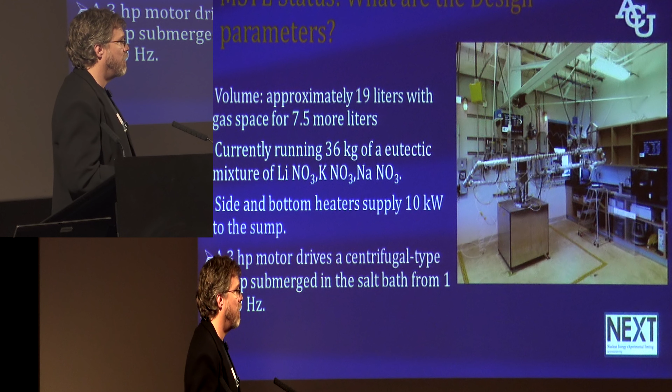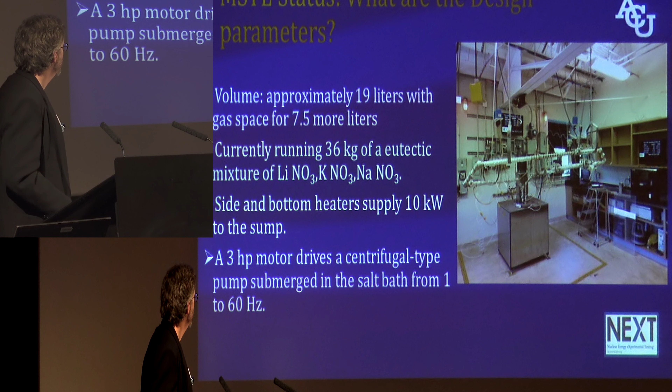The volume of salt that we have is about 19 liters, and there's space in the top for gas of about 7.5 liters. We're currently running about 36 kilograms of eutectic nitrate salt. The side and bottom heaters supply about 10 kilowatts total of power for our pot heat.

We also have heat tape that you saw a little bit earlier, I'll talk about more in a second. There's a 3 horsepower motor that drives a centrifugal pump. It runs from 1 to 60 hertz, and I'll also talk more about that in detail here in a second.

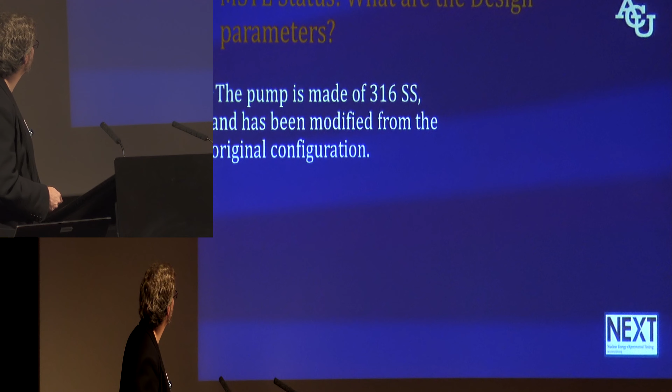So the pump is made of 316 stainless, and so are all the pipes and fittings that we're using.

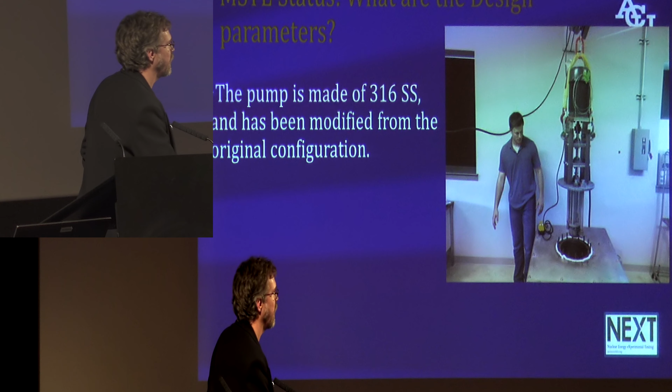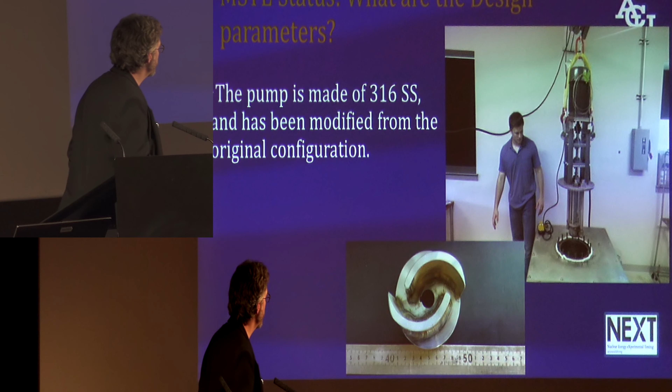We have had a little bit of trouble with the pump. Here's a picture of it as we're putting it in. We ended up having to modify it from its original configuration. Here's a picture of the impeller. It actually took us a couple of iterations to figure out, but we were having some trouble with resonance.

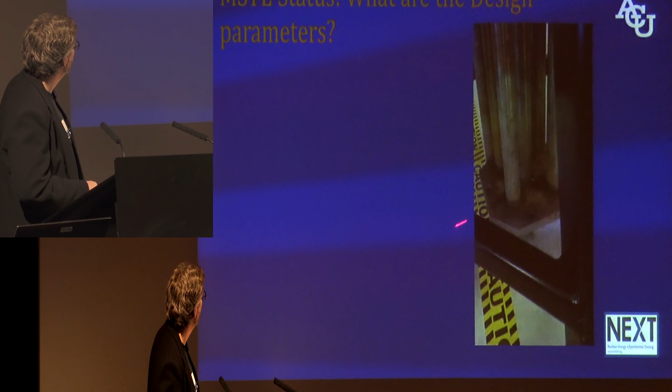You'd get to a certain speed and the thing would start shaking violently, and it would make sounds and make everybody run away. But what we found was, well, the impeller is not balanced. So we sent the impeller back. Well, that's an easy enough fix, right? Well, it turns out that wasn't all.

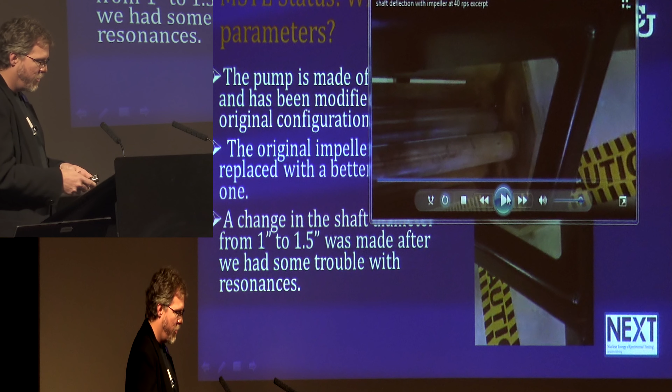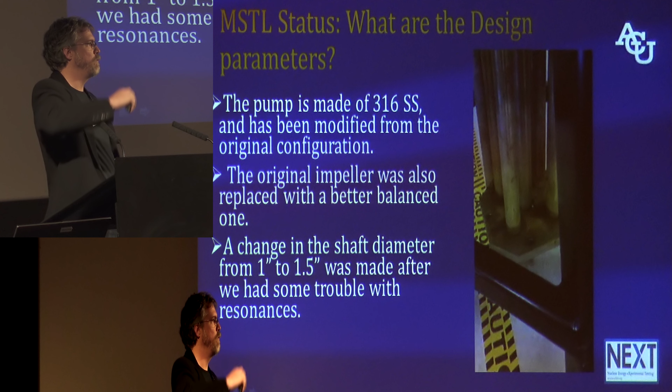That is not what you want your shaft to be doing at all. What we found was, after quite a bit of work and surprise, that the shaft for the pump was actually not round. Not exactly what you expect when you purchase a pump like this, but yeah, the shaft wasn't round. We went to a bigger shaft, because this is a cantilevered shaft, so the bearing support is a good 2 feet above the impeller. To make sure we didn't have this problem again, we asked to replace it with a 1.5 inch shaft instead of 1, and that fixed it.

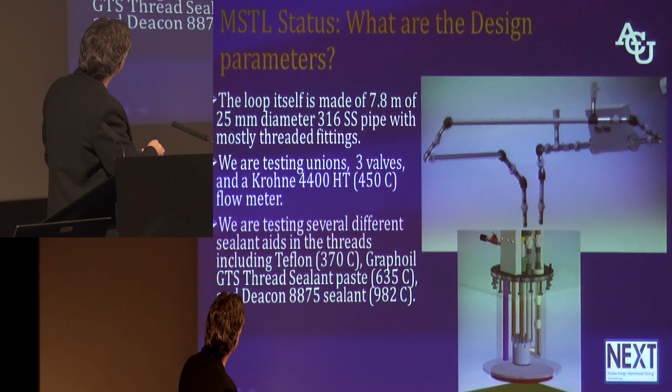So that was good, this is one of the trials we went through. The loop itself is about 7.8 meters of 25 millimeter pipe, so 1 inch for those of you from the US.

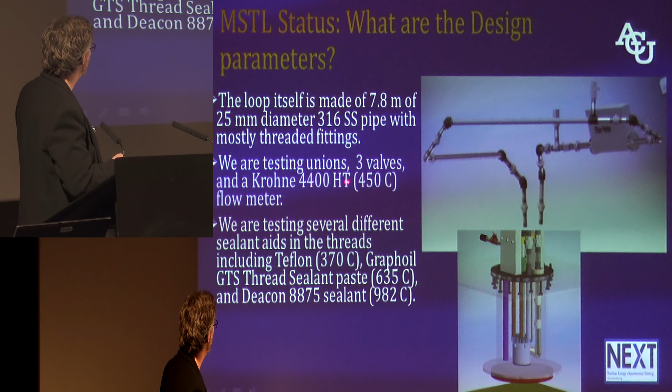In this loop system, we're testing unions and 3 valves and a Krohne 4400 HT flow meter. This is the highest temperature flow meter we could find. For 2-inch pipe, they claim it'll go to 600 C. For 1-inch pipe, they ratcheted down their claims to about 400 or 450. So we'll see what it can do.

We're also testing several different sealants in the threads just to see how threading works. Teflon, of course, we don't expect to go very high. We're trying out this graphite stuff, a mix of graphite and something else that goes a little higher, and then this very high temperature sealant that we're interested in looking at.

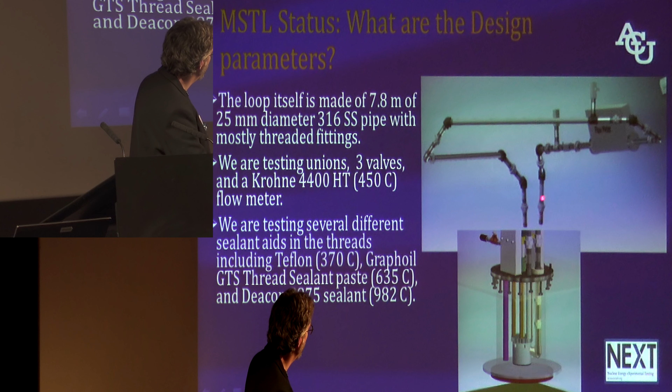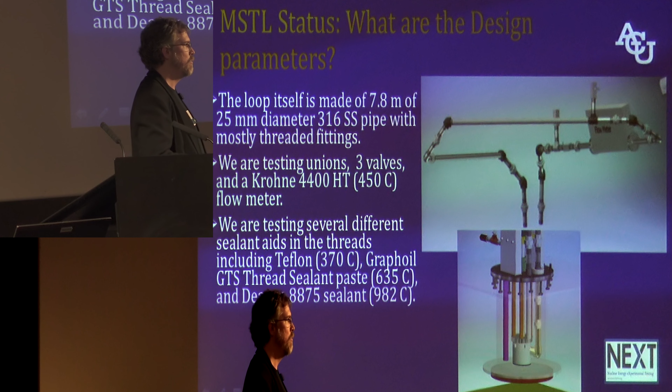Another thing we found when working with water in this system: we characterized our system with water, and in initial tests, there's a gray pipe that runs down from the return side of the loop. The silver looking one is the input to the loop, and the fluid goes around and down through the return. Initially we didn't have this pipe here, so the salt came in and splashed down into the pot, and that made lots and lots of bubbles.

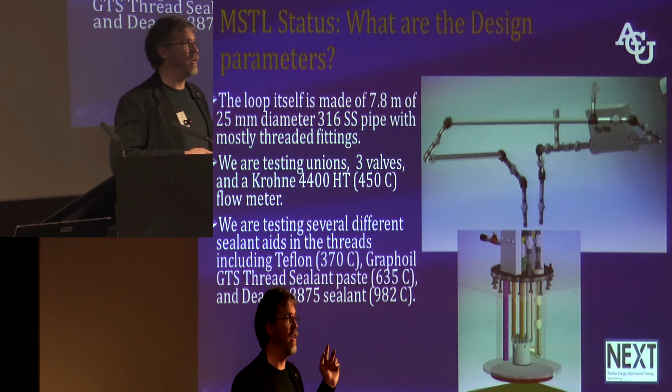It sounds like bubbles may be good sometimes - we're interested in that for filtering things and maybe getting a hold of some fission fragments. But in our case, it was causing the pump to cavitate, which is also a problem. It's also a problem if you're using an ultrasonic flow meter that uses non-Doppler methods. These time-of-flight flow meters need less than 2% of bubbles or other trash in the path, so it's very difficult to get them to read if you have a lot of tiny bubbles floating around. So we extended this pipe down into the liquid molten salt, which solved our problem with bubbles. It introduced other problems, which is why we have a valve up here to solve getting air trapped up there at the top.

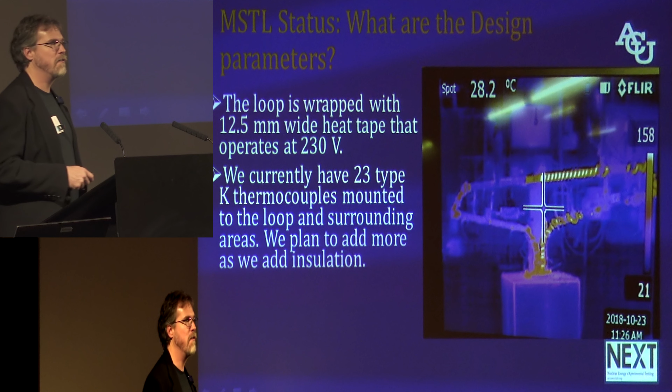We also have heat trace around the loop - about 4 kilowatts of it. As Dr. Pamplin said earlier, these are just wrapped, and there are sections here wrapped in aluminum foil to help spread the heat more evenly.

This was the first time we had run all this together, so we were interested in seeing how different things looked and how they were acting. Not everything is covered - of course we plan to insulate this as well. This was our first run, so we were looking for leaks, and we didn't want to ruin all of our insulation because all of the joints decided to leak at once. So we left off the insulation for the first run.

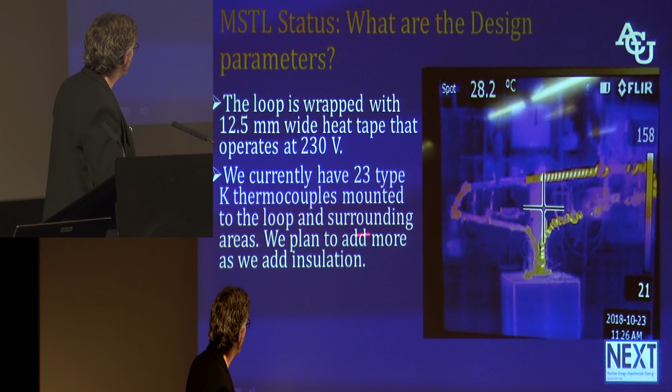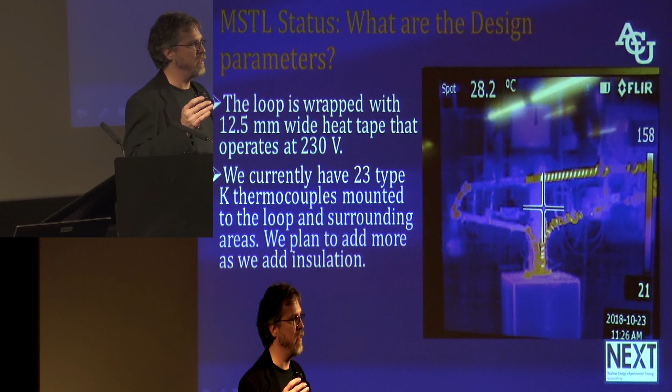We also are monitoring everything, keeping as good of tabs as possible on our heat at every point in the loop. We have about 23 thermocouples mounted directly to the loop itself and a bunch more everywhere else, monitoring bearing temperatures, motor temperatures, and every other temperature in the room. We even had some concern from folks in the safety office at the university that we might set off the sprinklers, so we've got thermocouples up on the ceiling monitoring temperatures near the sprinklers.

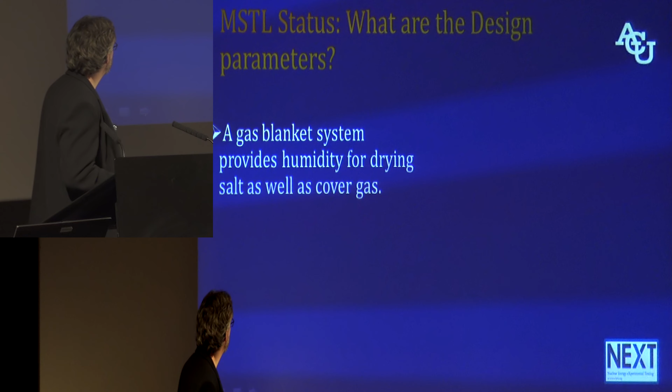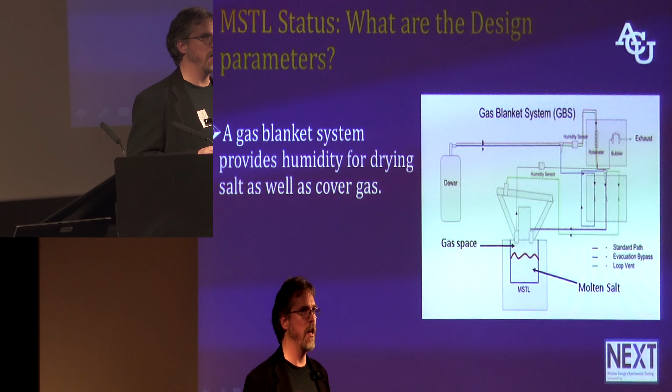We also have a gas blanket system made to help us dry the salt and to use as a cover gas. This is a quick schematic of what our gas blanket system is. For the current system, we're using nitrogen as our gas blanket. That might change to argon or helium or something else very easily.

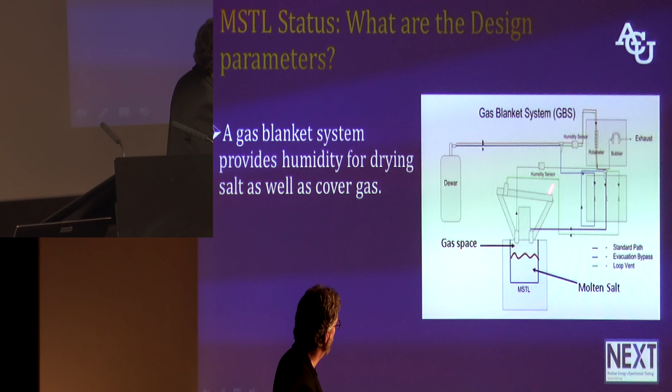We have a supply here that goes through a humidity sensor, through some set of valves, and into the tank. We also have a release valve here. Since both sides of the loop are actually beneath the level of the salt when it's molten, the salt gets stuck in the loop if you don't have this way to release it. So we have to put pressure in at the top of the loop, and that lets us push it out when we're ready to stop.

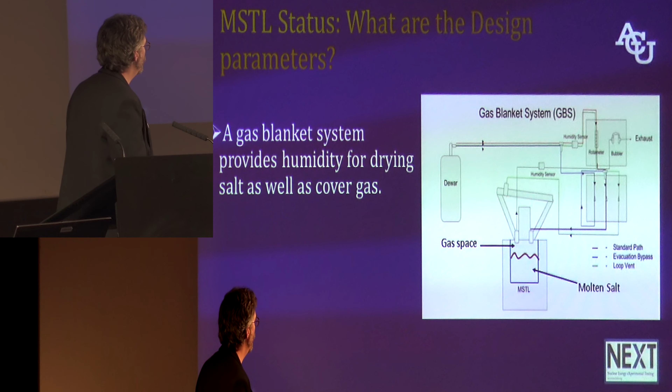So we also have a DAQ system. Our DAQ system is based on the MIDAS system developed at TRIUMF and PSI, and has been used for slow controls for physics for many years. You can monitor many things all at once, and it works very well.

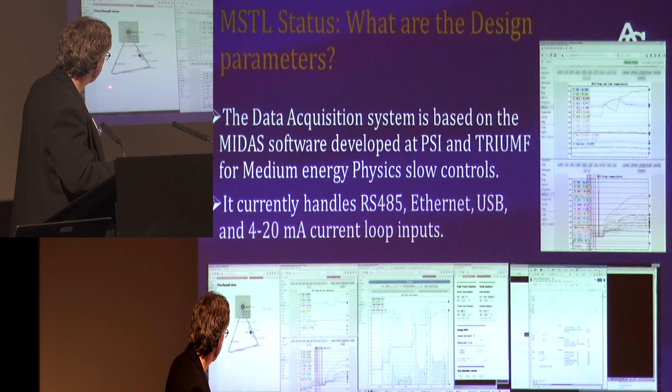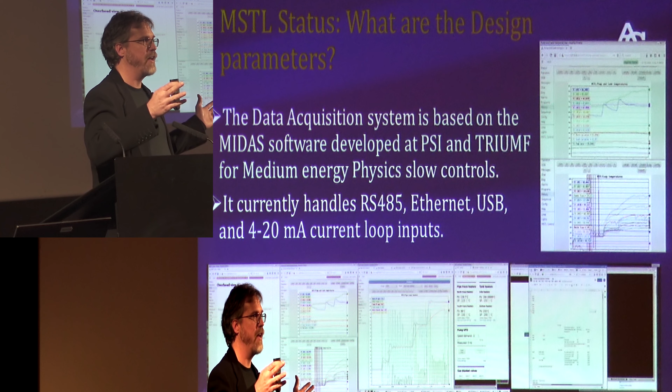We've got some programmers, so we add things to help us understand exactly where temperatures are different or what parameters we're really worried about. Besides this screenshot of the screen we use to control the loop, we also have 3 big monitors around the room so that we can monitor critical processes at all times.

So we characterized the system with water. We started with just a basic off-the-shelf flow meter. We put that in line with the Krohne high temperature meter, and we also did the simple thing: we pumped water into barrels and weighed it and said, okay, what's the mass as a function of time? Look at that slope, and that gives us a flow rate.

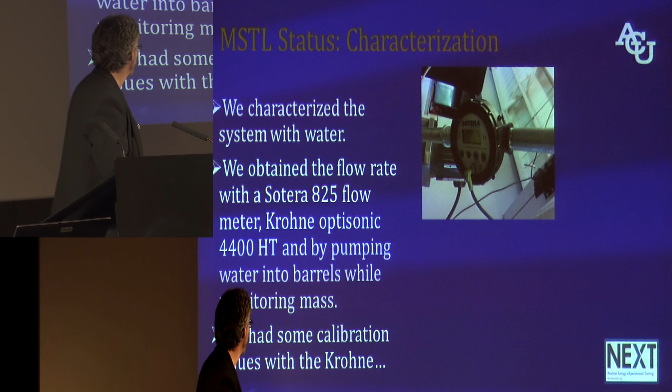It turns out we were very glad that we did that low-tech thing, because we had some calibration issues with our very expensive flow meter.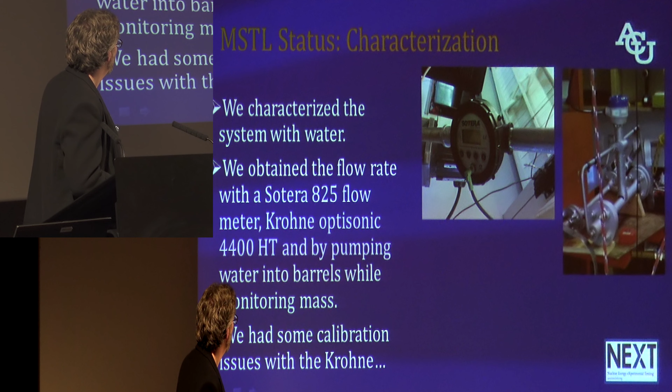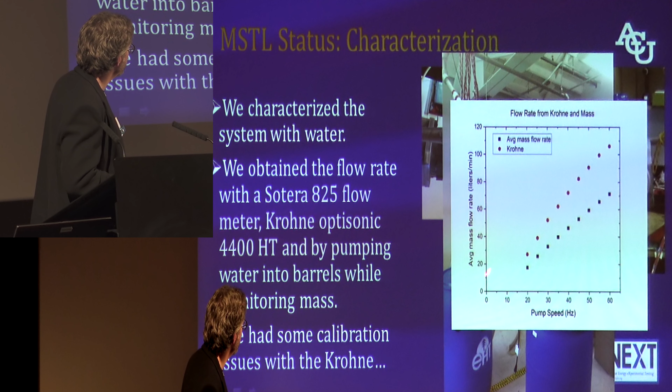So there's the acoustic one, and here's our barrel setup, and here's the flow rate. If you just plot mass flow into barrels versus what we originally got from our Krohne meter, you can see that wasn't the 1% claimed accuracy of this meter. So let this be a warning that you should test things. They don't always work like they say they do.

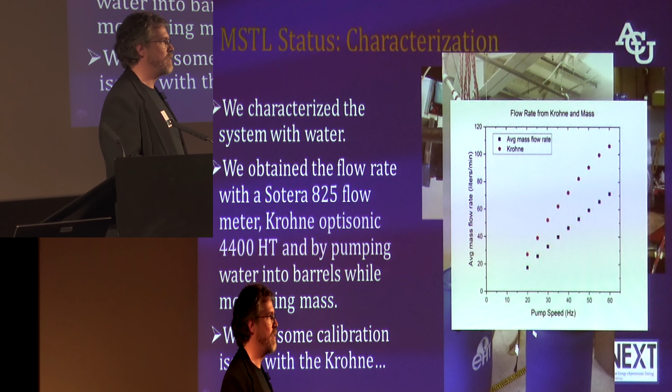After, I don't know, several weeks of back and forth with this company, we did get it fixed, and they just typed in a wrong number at the factory. So nothing really wrong, just something annoying to cost us some time.

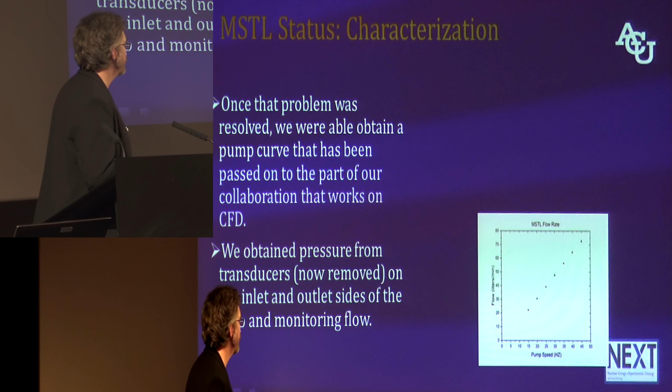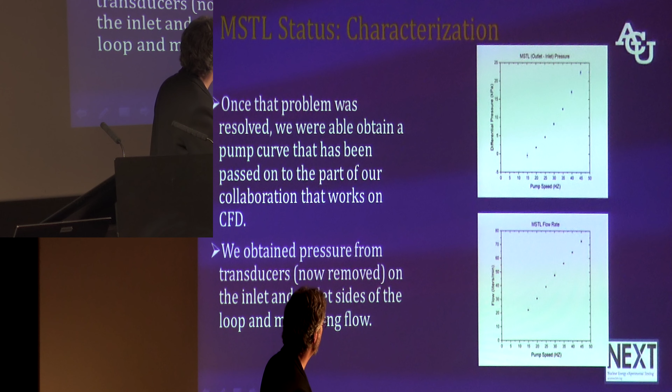We measured flow versus pump speed, and also differential pressure versus pump speed. This was exactly the same setup that we have currently for the molten salt, except we drilled 2 holes in some of the pipe sections on the input and output side of the loop, and placed transducers there for water, and measured those. Then we replaced them with whole pipe sections when we went to salt.

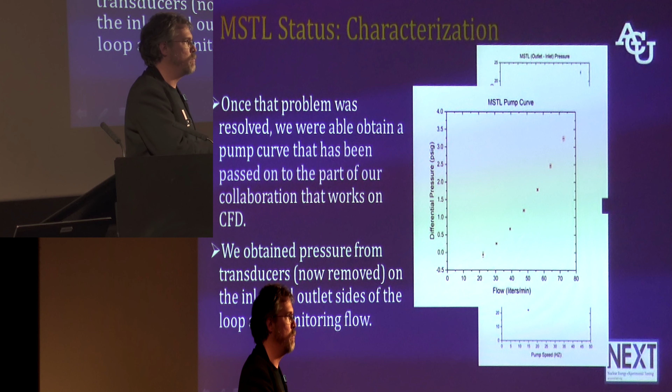Putting those together, we have a differential pressure pump curve that we can hand off to our colleague, Robert Brown, who does CFD. He has all of the measurements of the loop and will model this for us, compare his results to our experimental results, and then we can apply those things to salt and make sure that we know what we're doing.

Okay, so we have pumped salt, and how do we know? Actually, when we turned it on, the flow meter read 0. That was unfortunate and surprising, but I think I have an idea of why that is, but we still could tell that we flowed salt.

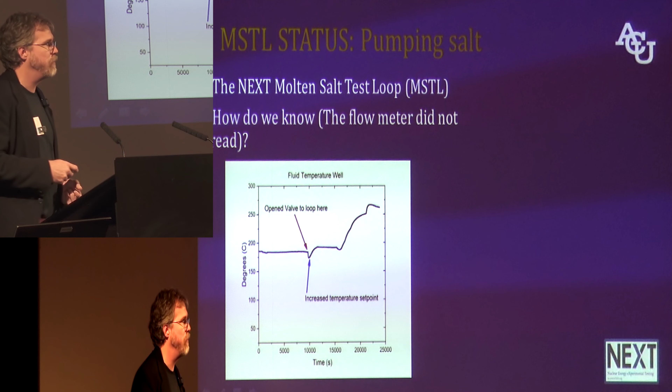When we turned the valve to open the loop, we had a precipitous drop in the temperature, and it was dropping so fast we were worried that it might freeze on us, so we turned up the set point to the heaters to add a little bit more heat. That's what this little blip is, where we were sure we were melting salt and getting it back around the loop.

Another piece of evidence is that we actually sampled salt, and you heard about this earlier in Dr. Pamplin's talk. We opened this valve while everything was pumping, and we were able to get salt out in its molten form.

So lots of things that we're looking to develop or test. We're looking at the Coriolis flow meter. Sporian Microsystems has a website that says they have a high temperature flow meter, but we haven't been able to get our hands on one yet. We'd like to test that.

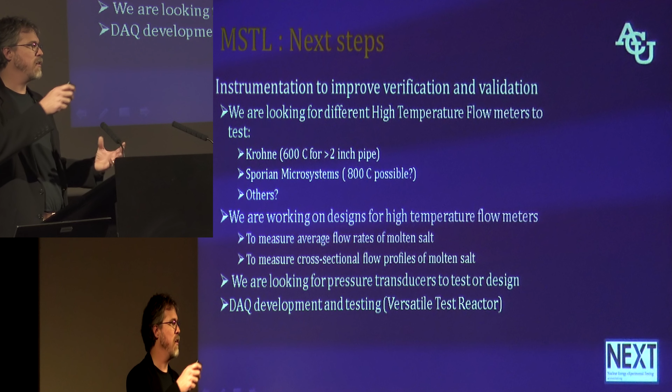If there's others out there who have things that they want to test, we'd love to try and test those. We're working on designs of our own for high temperature flow meters to measure average flow rates, but even better, it would be great if we could come up with a design to measure the cross-sectional flow of these things, and that would really help the CFD folks understand what's going on in the reactors.

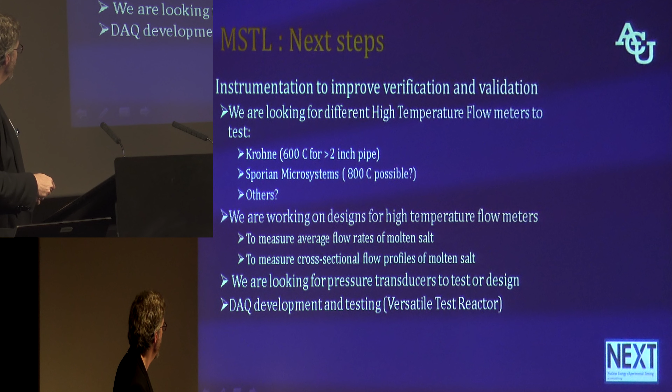So we're trying to move that way too. We're looking for pressure transducers and designs for those so that we can directly measure pressures of molten salt. And of course, we're looking at DAQ development.

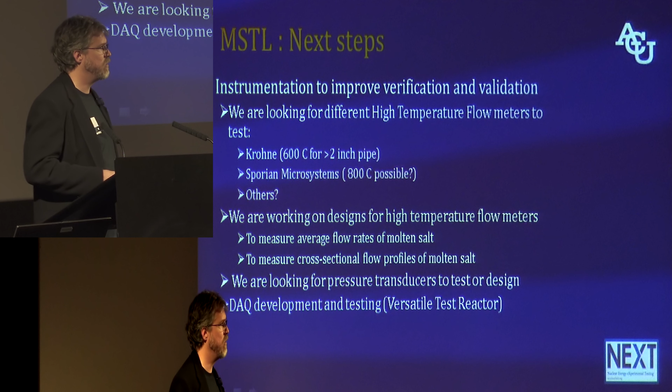We recently received a grant from the DOE to develop the DAQ for the scientific instruments at the Versatile Test Reactor that's just been approved. Our Congress can do something occasionally. So that's been approved, and we're moving forward with those designs.

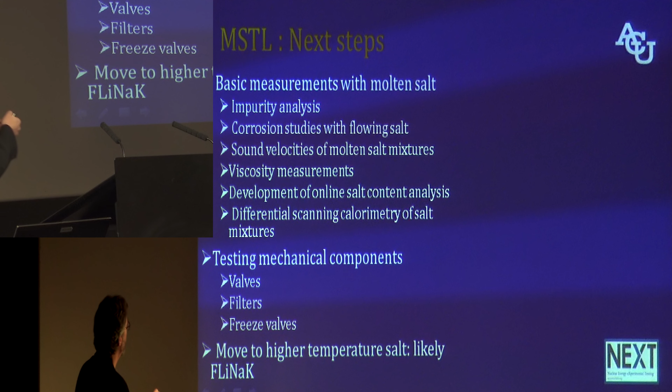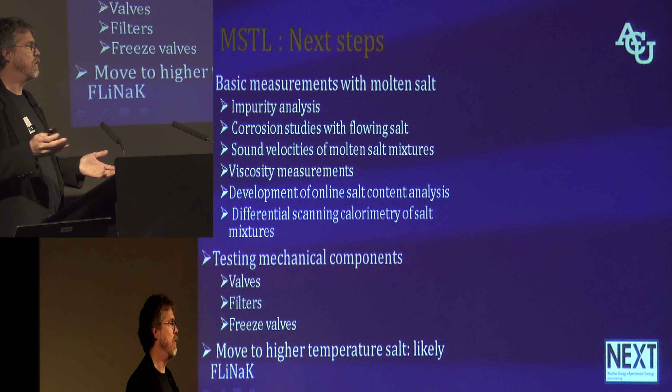What are our next steps? Impurity analysis - you've heard about a lot of these things earlier. We're looking at sound velocities and viscosity measurements, building up a catalog of these things for different materials and different mixtures of salts so that whoever needs them can use those. We think that's an important contribution to the community.

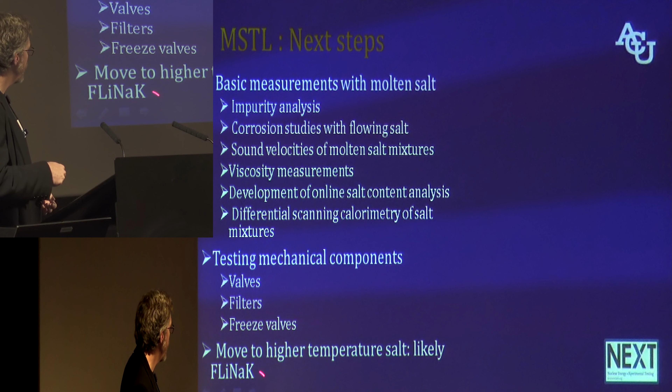We're also interested in testing mechanical things like valves and filters and freeze valves and whatever else needs to be tested. Then we'll move to a higher salt, likely FLiNaK at this point, but maybe not. Give us a reason not to do that, and then we'll look.

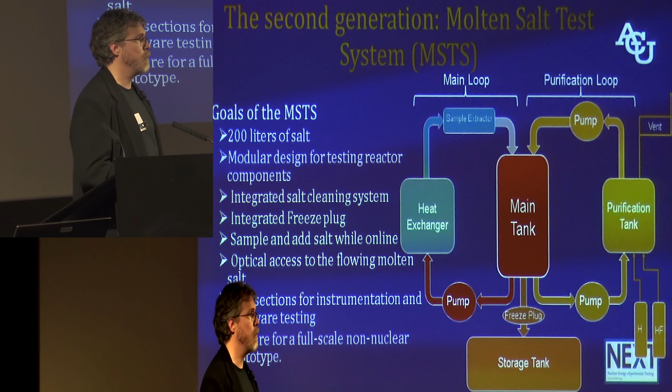So once we're done with what we think we can get done with the molten salt test loop, we plan to make a bigger one. The next step is to move from 20 liters to 200 liters. That gives us a step in the direction of what kind of volume you might need for a reactor. So this is just a very preliminary kind of drawing.

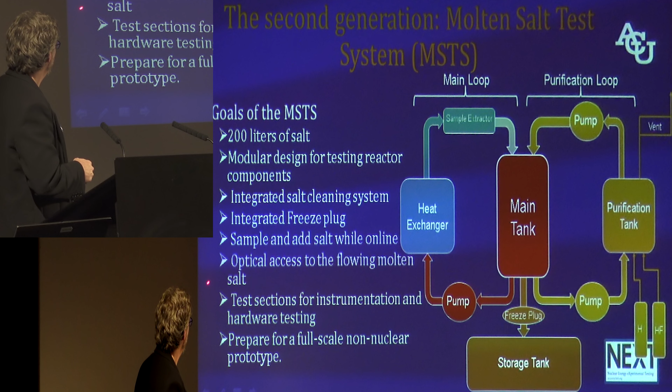We would want in situ purification of salts, and a few goals for our next system: we want it to be about 200 liters, modular so we can plug in and out different things to test. We want it to have an integrated freeze plug, a salt cleaning system, and optical access for LIBS or any number of Raman or other optical techniques. We think that's very important.

We want test sections for instrumentation and hardware testing, and we also want to prepare ourselves to go to the next step and build a full-scale non-nuclear prototype.

Okay, so that's a whole lot. I hope that I haven't bored you too much.

Thank you very much. I want to thank the people who have funded this work, and especially my colleagues and the students - notice they're undergraduate students, so we don't have a lot of grads to work with, but we do have a pretty good pipeline of undergrads, and we love working with them, it's great. Among the things with saving the world, I think almost half of our goal is probably to teach undergraduates and help them get started.